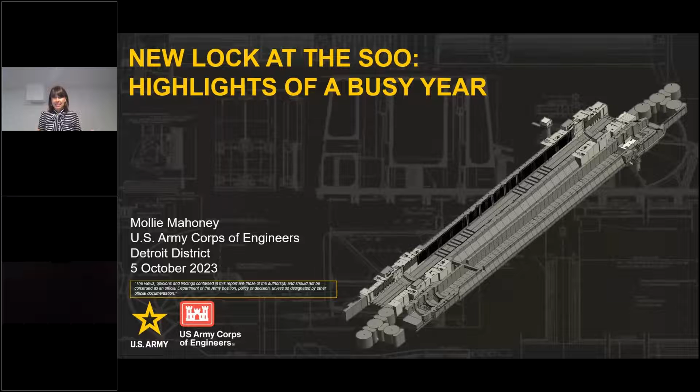As you all know, the Soo Locks are vital to the Great Lakes shipping industry, our regional and national economy, and our national security, which is why we are increasing resiliency at the facility by constructing a second 1,200-foot lock chamber at the Soo Locks. So today I'm going to provide just a little background and history on the project and the Soo Locks, talk about why we're constructing a new lock, and then go into a deep dive update on what has been accomplished over this last year.

Okay, so you are on the importance slide. Great. So most of you are probably familiar with this, but background and context are key. So I just want to briefly cover why the new lock and why the existing facility is so important. So the Soo Locks are a critical link in our nation's supply chain of iron ore from those mines up along the shores of Lake Superior to those steel mills along the lower shores of the Great Lakes. We've got two operational locks at the facility, you can see that in the bottom right-hand picture. We have the Poe lock, which is 1,200 feet long, and the MacArthur lock, which is 800 feet long.

So 95% of all of the iron ore mined in our nation passes through the Soo Locks facility, and due to vessel size, nearly all of that iron ore tonnage is restricted to the Poe lock. So we've got the iron ore up here and the steel mills down here, and the Poe lock in the middle connecting the two. So the Poe lock was constructed over 50 years ago with a 50-year design life. It is the Achilles heel of that supply chain of iron ore for our nation.

And it is estimated that within 2 to 6 weeks of an unscheduled outage of the Poe lock, 75% of our nation's high-strength steel production would cease. That would shut down our automobile, appliance, and heavy equipment manufacturing across our nation. It's estimated that a 6-month unscheduled outage of the Poe lock would result in 11 million jobs lost and a $1.1 trillion economic impact. Next slide.

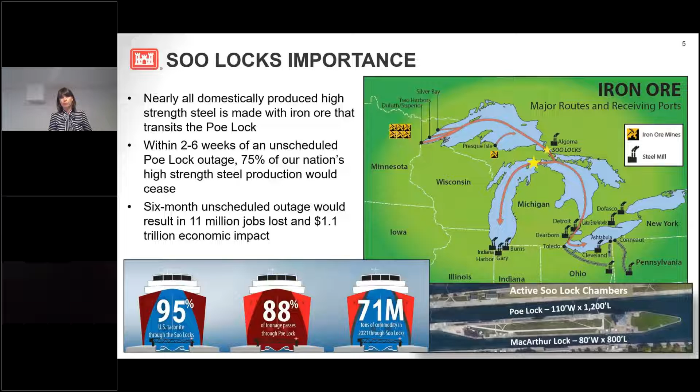So on the left of this slide is the current facility, and on the right is a rendering of our future facility. The new lock will be constructed within the footprint of the Sabin lock. However, the new lock is 30 feet wider and 9 feet deeper than that Sabin lock chamber. The Davis lock will be filled in with construction debris, as you can see in that picture on the right, and a new pump will be constructed within the footprint of the Davis chamber at the far downstream end.

So the new lock and the Poe lock are not only the same size, they also have many of the same components and systems to help reduce the number of spare parts that we need on site. So the miter gates are interchangeable, the filling and emptying systems are identical, which means our culvert valves and our bulkheads are all interchangeable between the two locks. The ship arresters will be the same, so we only need one extra motor on site, one extra ship arrester boom. The list goes on.

However, while we were going through the design process, there was an intentional effort to have the new lock incorporate new safety features and new technology that'll help with operations and maintenance and transiting the new lock facility. So during the design process, we were able to improve safety by including the hands-free mooring system on our new lock. Hands-free mooring, I'll touch on it a little bit later, but it's a large vacuum pad system that will reach out and hold the vessel and ride up and down on rails instead of using traditional line handling.

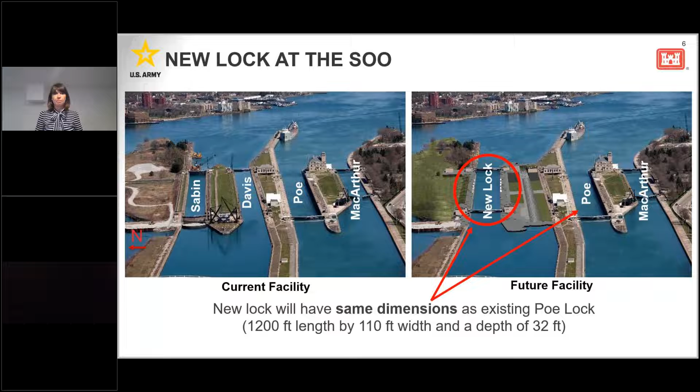So the remaining work for the new lock was broken down into 3 phases back in 2018 when we did our big reevaluation study. So those 3 phases are listed here in the order in which the work was initiated. So not going to spend too much time on the slide because I'm going to go into each phase, but just wanted to point out that the phase 1 contract for deepening the upstream channel was completed in August of 2022. Our phase 2 contract for rehabilitation of the upstream approach walls is nearly 80% complete, and then our phase 3 contract is nearly 10% complete. Next slide.

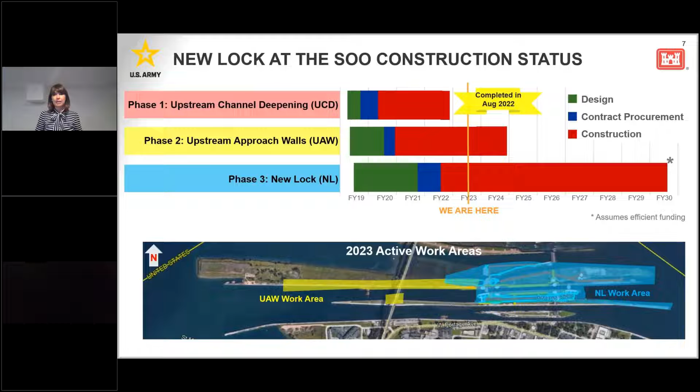I'm not seeing the next slide, but it should be a slide on our allocations and capabilities. Michelle, can you confirm if it's there? Okay, there we go. There seems to be a slight delay in when you see them and when I click the button. Okay, got it.

Okay, thank you. So the project has been funded $1.887 billion to date. That funding to date is represented with those gray bars on this graph here. And those funds have allowed for completion of the phase 1 deepening, substantial progress on phase 2 upstream approach walls, and then the award of 70% of the phase 3 construction contract.

So the remaining minimum capability for the project is right around $560 million, represented by the yellow bars on this graph. The lion's share of that remaining capability is in 2024 and 2025, and it's tied to that phase 3 construction contract. So the way the phase 3 contract currently stands, it includes about 70% of the required work. And we have locked in pricing for the remaining 30% of the work, but that pricing has an expiration date because it just wouldn't be fair to require the contractor to hold that pricing indefinitely.

So each remaining option on the contract, not optional, the work needs to be completed, but that's how the Corps of Engineers refers to our contracting mechanism. Their contracts, it's the Corps' option to award those options on the contract. So that remaining work on the construction contract is about 30% of the total work. If all goes as planned and we continue to receive efficient funding, we should be able to stay on track with a project completion in 2030, and with that meeting that about $560 million in additional capability. Next slide.

Okay, so the first phase of construction was the deepening of the upstream approach channel to a depth of 30 feet. So this mile-long approach channel was not deep enough for modern vessels, and in some areas as much as 6 feet of bedrock needed to be removed. So the figure on this slide shows the scope of work for that contract. That blue line on this image denotes the limits of the channel deepening. And everywhere within that blue line, the channel is now a depth of 30 feet.

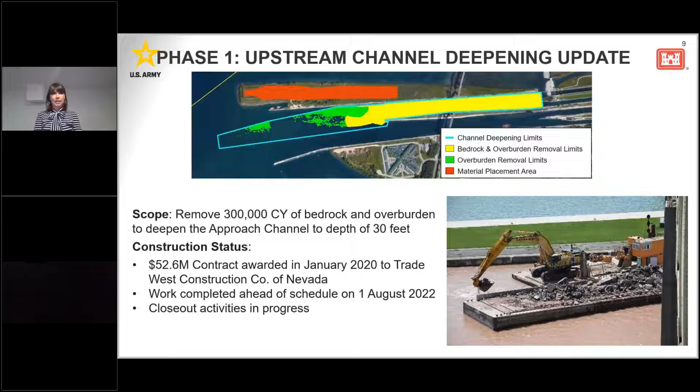The contract included removal of bedrock and overburden material. The material that was removed from the channel was placed on the northwest pier, which is shown in red here. It's property owned by the Corps of Engineers, and by the time construction is complete, that material will be as high as 80 feet above the surface of that pier and will act as a windbreak for vessels passing through the new facility. So this work was performed by Trade West Construction of Nevada. It's a $52.6 million contract awarded in January 2020 and completed in August of 2022. Okay, next slide.

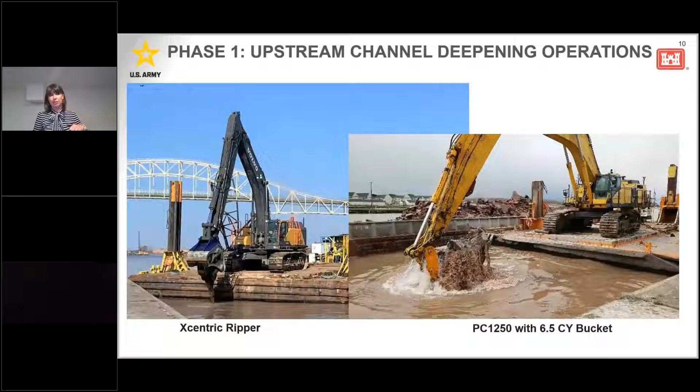Here is some of the 300,000 cubic yards of material that was removed from the channel. Roughly two-thirds of the material was bedrock, and you can see the bedrock in the pictures on the left and in the center. On the right is overburden material, about a third of the material, which is sandy, silty, overburden material.

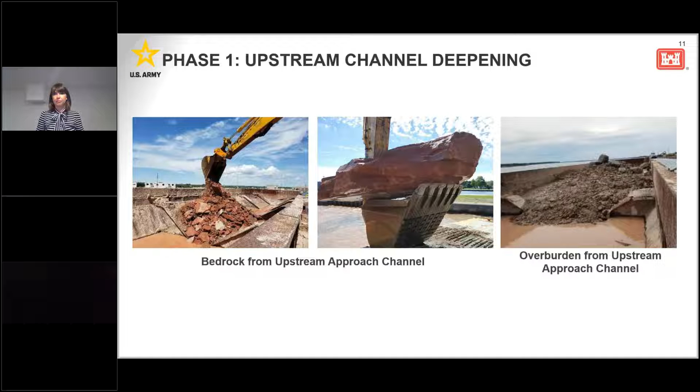Phase 2 is the upstream approach wall project. This project consists of rehabilitating nearly 4,500 lineal feet of the 100-year-old approach walls upstream of the new lock. As downbound vessels enter the new lock chamber, they'll ride along that north wall, so rehabilitation of that north wall on the upstream side is a priority. Included in that rehab are new LED high mast lights and new mooring bollards. This was a $117 million contract awarded to Kokosing-Alberici in September of 2020.

You can see on this image that there are several different approaches to rehabilitation being employed. The blue area consists of 34-foot diameter steel sheet pile cells constructed in front of the existing approach walls. The orange area is our transition walls, steel sheet pile transition walls that connect that bumped-out area back to the face of the existing wall. The purple areas are refaced with steel sheet pile and then backfilled with flowable concrete. The green areas are being refaced with a soldier pile wall, consisting of H piles and concrete panels that go between those H piles. I'll show pictures of all of those in just a second.

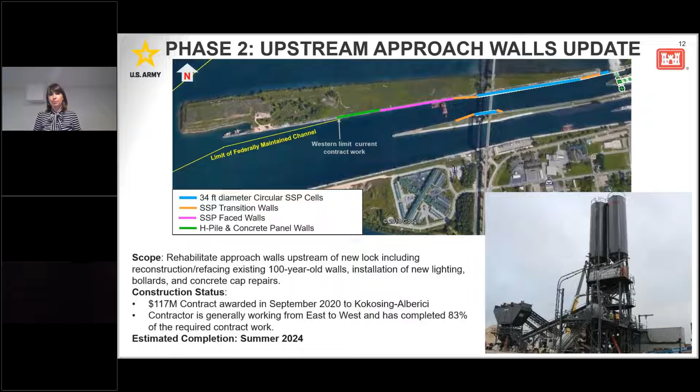I did want to point out the batch plant that's been constructed on site. This project is very concrete heavy in terms of the scope of work being performed, and transporting concrete trucks across the active navigation channel on barges, passing through freighters trying to transit the facility, would be extremely inefficient and time consuming. So a concrete batch plant was constructed on site to provide all the concrete being placed for this project.

Here we've got some pictures from construction in that blue area on the image, where we're constructing those 34-foot diameter steel sheet pile cells in front of the existing approach wall. The circular cells act as a basket that's filled with sand, aggregate, or concrete, and then we put a cap on top. On the left is a template for those circular cells. If you've been on site lately, you'll have seen that template still on site, with one of our nose piers being stored there for the time being. In the middle, a sheet pile is being driven down into the channel bottom using that template as a guide. On the right is that steel sheet pile cell that's been constructed, filled with sand and aggregate, and topped off with about 5 feet of flowable concrete on top of the cell.

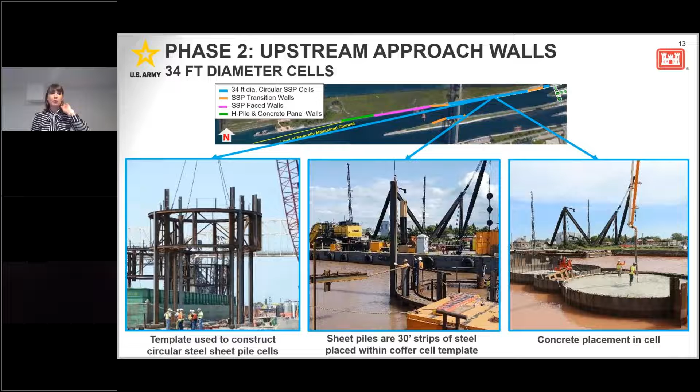Here are some pictures from 2022 progress on site. The most visually significant progress made on site to date has been the construction of this portion of the approach wall. This is a time lapse from April 2022 to September 2022. You can see those circular cells on the left being filled with aggregate and sand, and as you move to the right, you can start to see concrete being filled in the top of that cell, about 5 feet of flowable concrete. On top of those cells will be the walking surface of the approach wall, with a concrete cap placed where the mooring bollards and high mast LED lights are placed, forming the walking surface of the future approach walls.

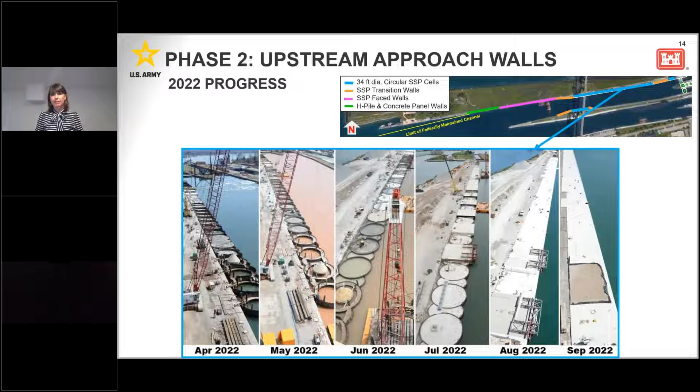Here are some pictures from that orange area, where steel sheet pile transition walls are being constructed to connect the face of that bumped-out area with those 34-foot diameter cells back to the face of the remainder of the approach wall. On the left is our northwest transition wall — you can see the face made out of steel sheet pile, and behind it they're placing flowable concrete. On the right is a final cap being placed on top of the transition wall on the south side of the channel, including the formwork used to form up that concrete cap.

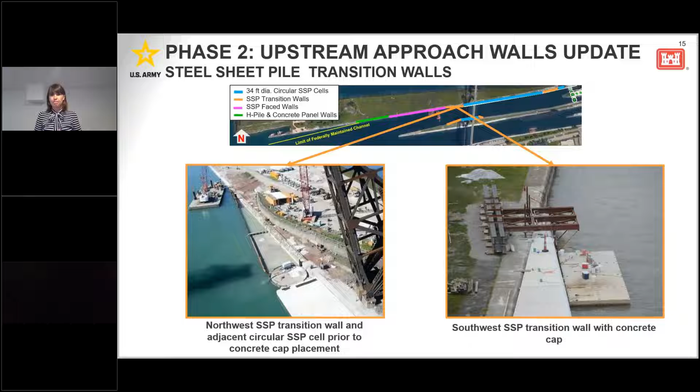Okay, so here are some pictures from the purple area of work. In these purple areas, the existing wall is being faced with a new steel sheet pile wall. On the left, you can see the steel sheet pile has been placed and is being anchored into place. Once it's anchored into place, it'll be backfilled with tremie concrete.

You can see that picture on the bottom right is one of the methods being used to anchor that wall in place. That's actually a 4-foot long pin placed at the bottom of that steel sheet pile wall, down at the bottom of the channel, which helps hold the bottom of the wall in place before the tremie concrete, or flowable concrete, is placed behind it.

That's a view from a diver's video camera. We use divers for inspection, for placement of the pins, and for inspection of the pins before the concrete is placed. And then on the top right, you can see formwork for concrete caps that were placed on top of that steel sheet pile wall.

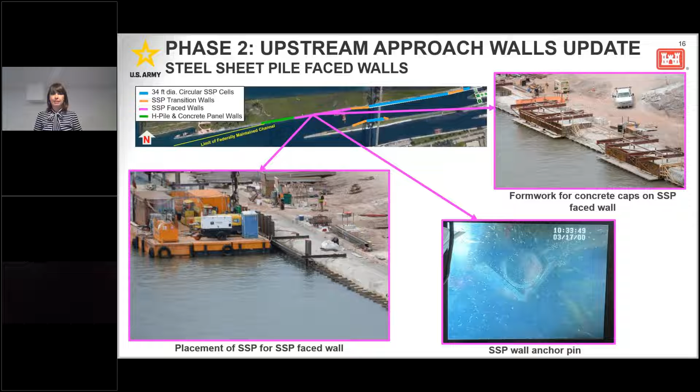Okay, so here we've got some pictures from the green area. This area is where we're placing a soldier pile wall in front of the existing wall. This wall is constructed with H piles placed about 8 feet apart, with concrete panels that slip between those H piles. In addition, that wall system includes drilled shaft deadmen placed back behind the wall to help hold it in place.

You can see pictures of that here. In the top left, we have a drill rig installing those drilled shafts. And in the bottom left, you can see a row of those drilled shaft deadmen that are back behind the new wall. Roughly 50 of the 70 drilled shafts that need to be placed have been constructed, and that work should be wrapped up in the next few weeks.

Now that we're getting near the end of finishing those drill shafts, we are going to start placing the H piles and the concrete panels. If you are up at the Soo, you will likely see that first H pile being placed tomorrow. We are getting started on that late this week, and those H piles will go in, and then they'll place those concrete panels between the H piles, which will face the entire face of the existing wall.

Then they will backfill behind that soldier pile wall with flowable fill and put a cap, that concrete cap, on top of the entire length.

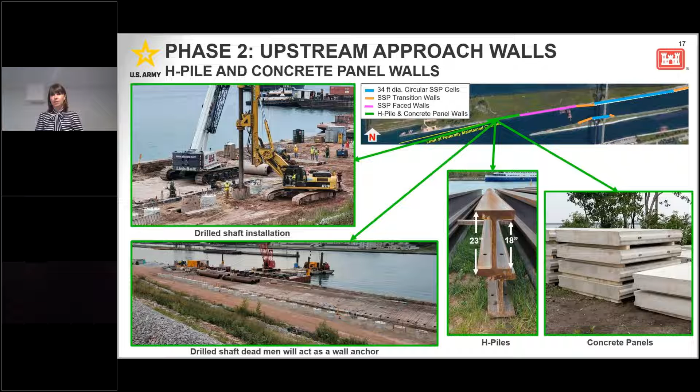Okay, so phase 3 is construction of the new lock chamber, which will be 1,200 feet long, 110 feet wide, and 32 feet deep, matching the dimensions of the Poe Lock—not an inch wider or an inch deeper. The phase 3 contract also includes construction of the downstream approach walls, a bridge to our hydropower plant, and a new pump well that will service the entire facility.

The contract was awarded in July of 2022 to a joint venture between Kokosing, Alberici, and Traylor Brothers. The current contract value is $1.347 billion, which is 72% of the total contract value of $1.872 billion. As I mentioned, as we've received funds, we have added additional work to the contract, and we have about 30% of that work remaining to be added.

In 2023, the contractor has worked on activities required to dewater the construction site, which will happen next year. They have focused on demolition of existing structures, moving utilities, constructing a new bridge to the new power plant, and we'll be starting construction of the coffer cells in the next month or so, which will be required to dewater the construction site.

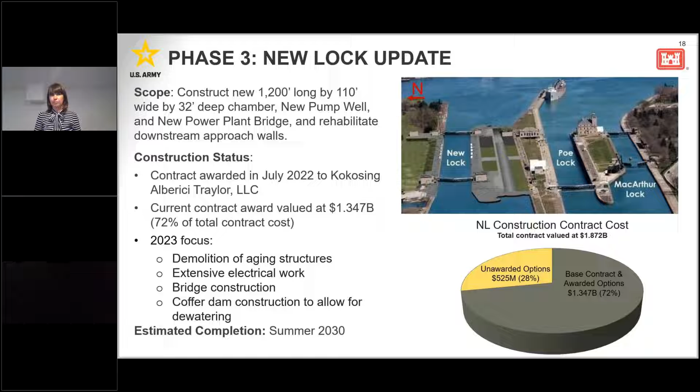So here we've got some key features of the new lock. The lock walls are comprised of a series of concrete monoliths, shown in purple and orange here. They're basically like giant Lego blocks that fit together, placed in 5-foot lifts, and each one is roughly 70 feet tall.

The chamber monoliths are shown in orange. Those monoliths are thicker at the bottom and narrow to about 25 feet at the top. They are fairly simple compared to the wide wall monoliths.

The wide wall monoliths are shown in purple, and that's where all of the mechanical and electrical equipment is housed. The miter gate leaves are also anchored to those monoliths, so they're more massive in size. The purple monoliths are about 60 feet wide, and that width carries the entire depth of the wide wall monolith.

The miter gates are shown in red. We will have one upstream miter gate and one downstream miter gate on the new lock. The gate leaves are 61 feet wide, and each leaf weighs more than 200 tons. As mentioned earlier, the gates on the new lock will be the exact same dimensions as the ones on the Poe lock, so they are interchangeable—another feature to reduce spare parts required on site.

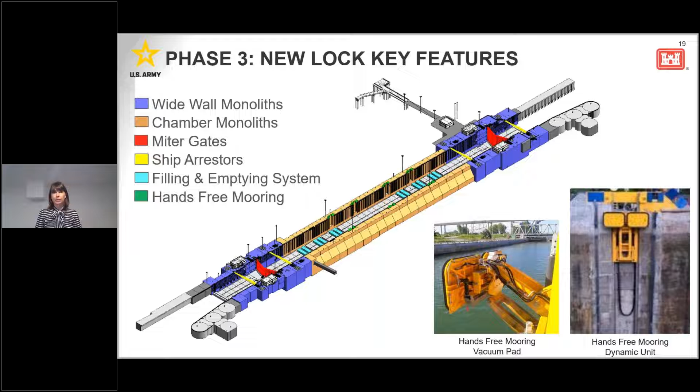What makes this project really unique compared to other projects is the remoteness of our site. Not very flashy pictures here, but just wanted to give a taste of the challenges of working on our construction site. It's in the middle of the St. Mary's River on an island, separated from land by an active commercial navigation channel.

You can see here on the left a lubrication truck being barged over from the Sault Ste. Marie mainland to service the many pieces of construction equipment on the site that require lubrication—just evidence that every little task requires a large amount of effort to complete.

On the right top is a temporary bridge being constructed to provide access to that green triangular piece of land on the north side of the construction site, where we're placing fill material and rerouting some electrical lines. In order to access that area of the facility, we had to construct a bridge just to get across to that side. That bridge will be removed after construction is complete.

On the bottom right, you can see a picture of the contract workers being shuttled to the construction site. At the peak of construction, we're anticipating 400 to 500 workers on site each day, and each of those workers needs to be shuttled from the mainland over to the construction site.

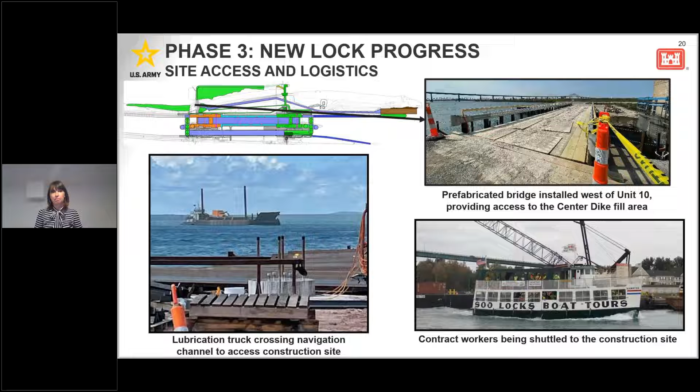I've got a few slides here covering the demolition of existing structures. Here are some pictures of the demolition of the downstream nose pier. If you live in Sault Ste. Marie, you've probably heard the tap, tap, tapping most of the summer long of equipment breaking up concrete. The majority of that work has been on the downstream and upstream nose piers on the lock facility.

So here you can see what the nose pier looked like prior to the demolition starting in May of 2023, and then how it's progressed throughout the season, with that picture on the right taken earlier this week. This demolition work is underwater, which complicates things and slows down progress. It's a lot harder to demolish concrete structures underwater versus above water. In addition, these concrete structures are over 100 years old, and concrete continues to harden in this marine environment, making breaking up that concrete even more challenging.

Once this concrete nose pier is completely removed, that will be the location for the new cofferdam cells right along that area. So this activity is a precursor to constructing the downstream coffer cells.

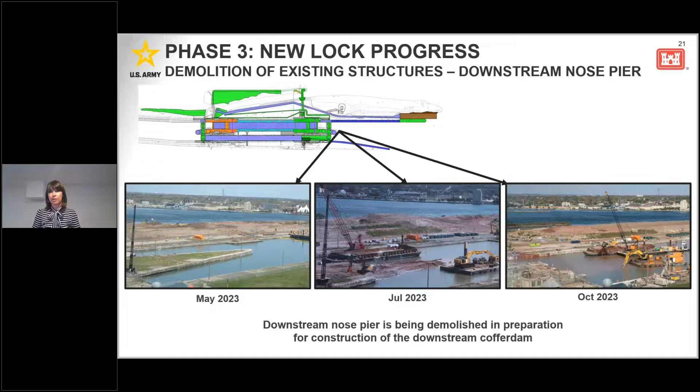Here you can see some preparation for removal of the Davis lock miter gates. The contractor has started removing those miter gates, and before they can be removed, there's selective abatement of lead paint and other features that need to be removed before those gates can be lifted by a crane, put on a barge, and taken off site.

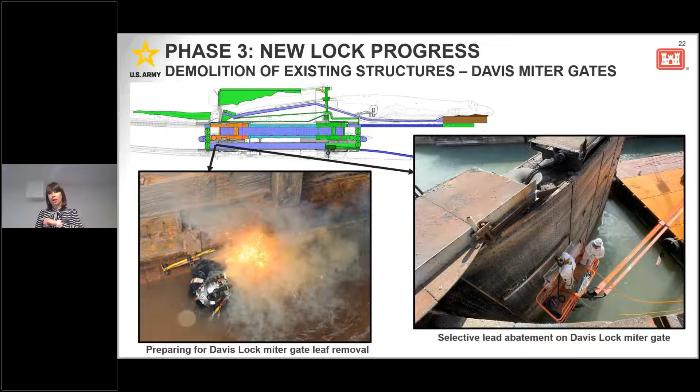Here are some pictures of some of those miter gates from the Davis lock chamber being removed. One of the large cranes on site is used to lift that miter gate and then place it on a barge, and those miter gates are taken off site for recycling for the metal they contain.

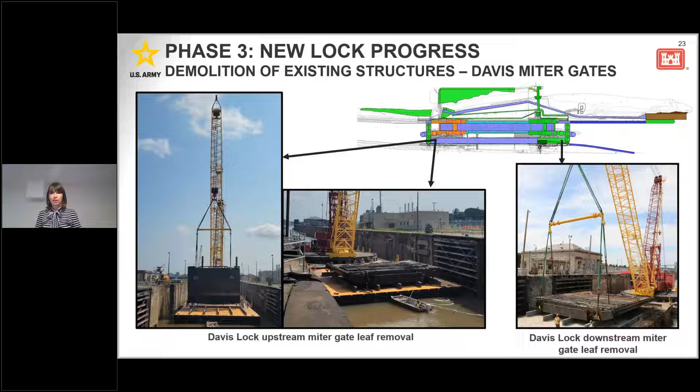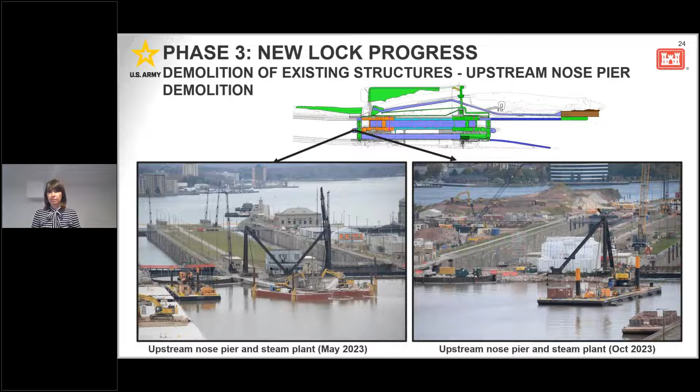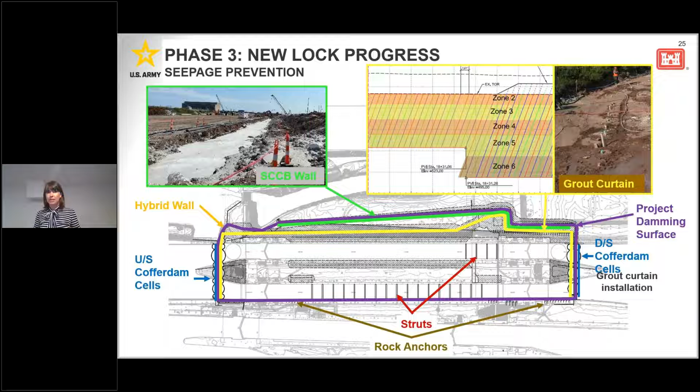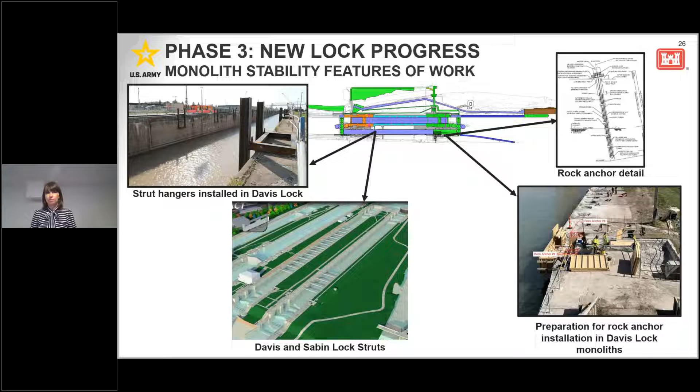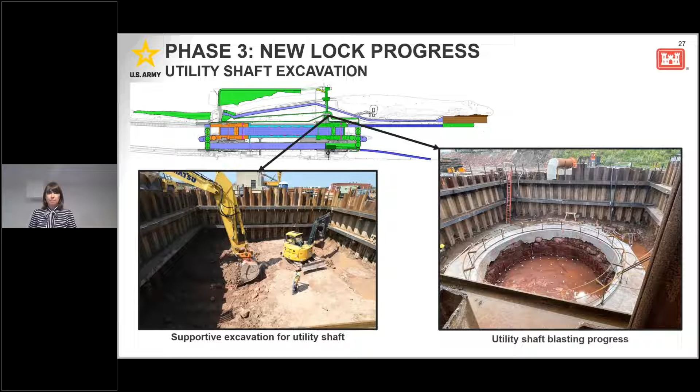So here we've got some work also going on this year, getting ready to excavate next year and remove the Sabin lock, and then excavate bedrock down to what we call our founding elevation—the elevation of the bottom of the new lock monoliths. It's really important that when we start placing those new 70-foot tall monoliths, they are placed on structurally sound bedrock.

We've got Jacobsville sandstone up at the Soo that has weak clay seams passing through it. So what's going on this year is a lot of drilling of rock cores.